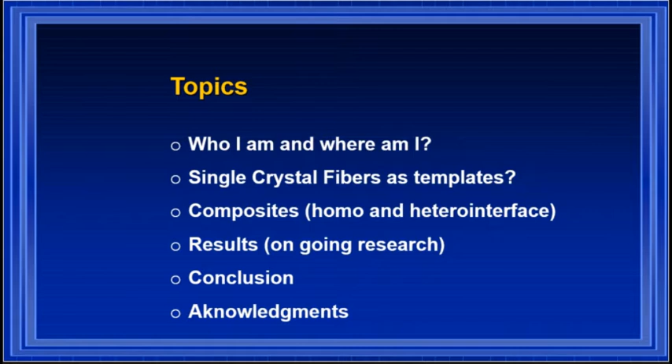Let's start with who I am and where I am. My name is Marcello Andreeta. I'm an associate professor at the Materials Engineering Department at Federal University of São Carlos, Brazil.

My research topics of interest are photonic materials processing regarding laser and microwave, clean energy harvesting, generation, efficiency, single crystal growth with new and conventional techniques, oxide glasses with laser processing, composites, and innovative devices.

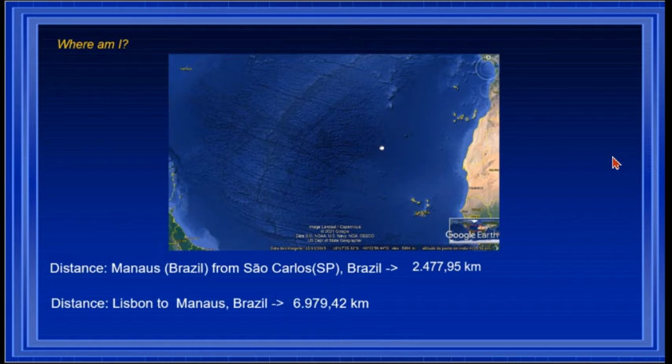Where am I? So we should all be here at Lisbon. If we go around the Atlantic, we can move to the rainforest, where everyone knows where it is, and we are far away from it in São Carlos University at São Paulo State in Brazil.

So we can see the difference in distance from Manaus. These are all well-known cities from Brazil.

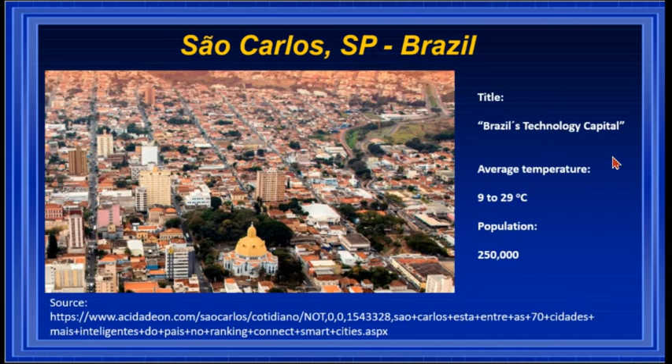This is our city, São Carlos, in the state of São Paulo, Brazil. It has the official title of Brazil's technology capital because of the several universities we have in the same city. The average temperature during the year ranges from 9 to 29 degrees Celsius, and the population is around 250,000 people.

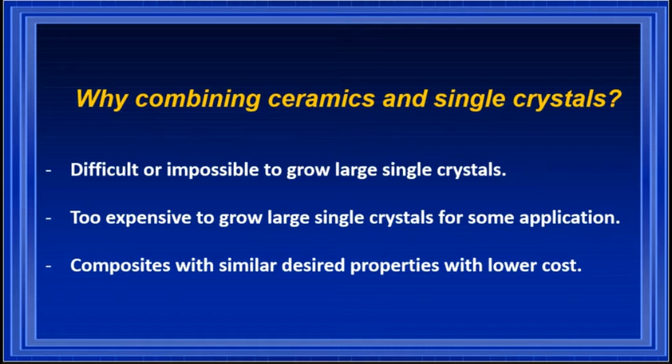So why combining ceramics and single crystals? You might consider the case where it might be very difficult or even impossible to grow large single crystals, or too expensive to grow large single crystals for some applications. The composites might have similar properties with a lower cost.

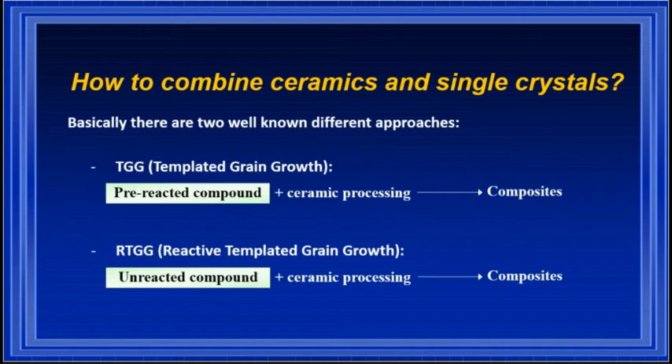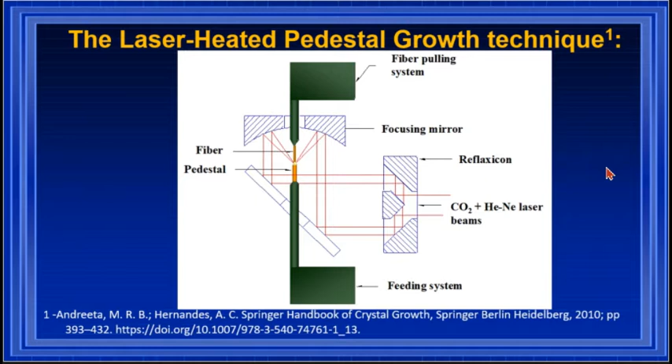There are some techniques to produce single crystal fibers. One of them is the laser heated pedestal growth. A CO2 laser is used to heat a pedestal, creating a molten zone, and then the procedure is similar to a miniature floating zone—the same procedure as the conventional, well-known floating zone technique.

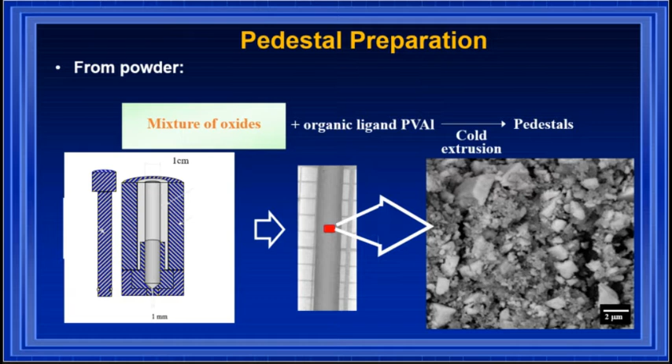The pedestal preparation, in our case, was done just with a mixture of our oxides with the introduction of an organic ligand, polyvinyl alcohol, and then through a cold extrusion process we produce cylindrical pedestals. We use this pedestal as-is, without sintering, to produce the single crystal fibers.

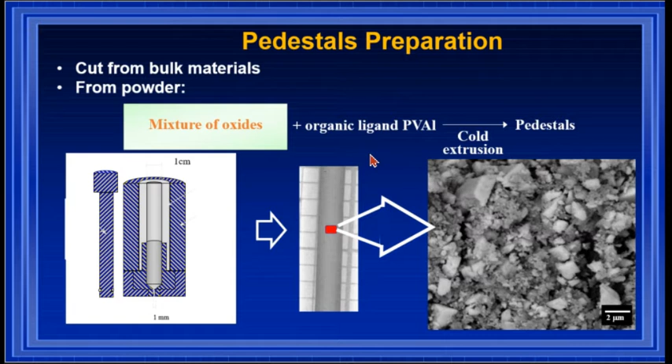This is the case where we produce the lanthanum aluminate fibers and zirconia fibers that we are going to use in this work. To avoid diameter fluctuation, we developed in our lab an automatic diameter control based on an artificial vision system. It looks at the molten zone and then controls the laser power and the pulling speed to control the diameter.

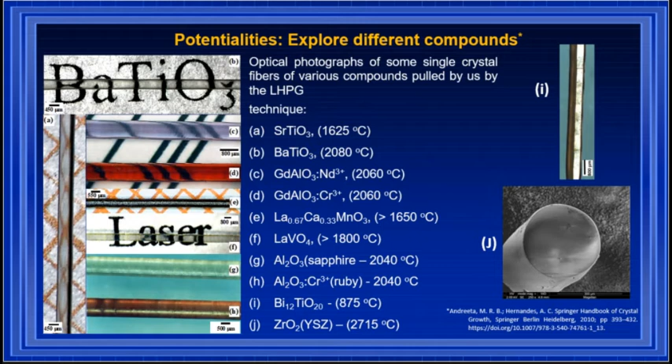In a previous work, we already did some work using strontium titanate templates in PMN-PT ceramics, and we got excellent results regarding texturing the ceramics, as you can see here in the dielectric properties.

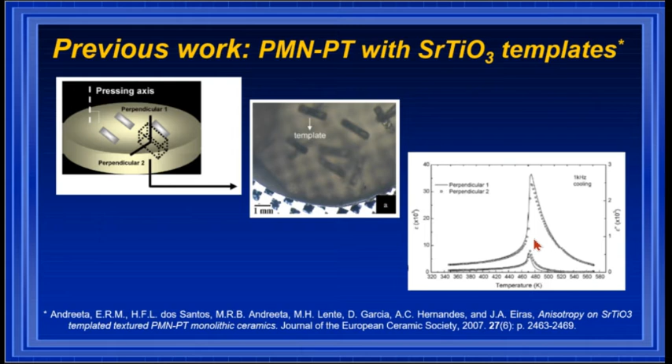So what else is new, since we already did some single crystal fiber templates inside ceramics? We think that we can improve the design of the electrolyte.

If we think of an electrolyte as a material between two electrodes, we are searching for better ionic conductivity in this solid state electrolyte. Our hypothesis is that if we combine ceramics that can interconnect the two electrodes, besides the single crystal fibers, it will create an interface that can interconnect the two electrodes without any grain boundary. That's our hypothesis, to try to improve or enhance the ionic conductivity of solid state electrolytes.

Regarding the fiber-ceramic combination, we can have a homointerface, where the composition of the ceramic is the same as the fiber, and a heterointerface, where the composition of the fiber might be completely different from the ceramics.

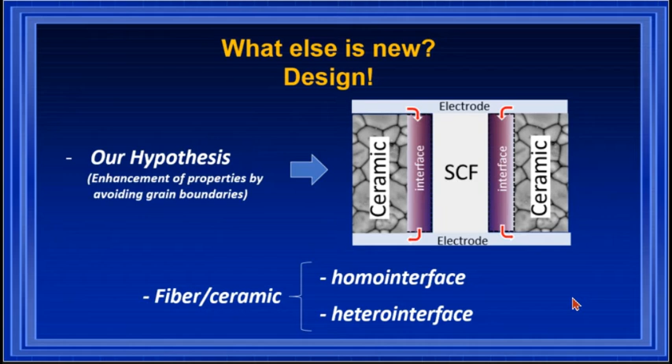Now I will present some of our results regarding the composites. We start with the homo interface, where we use yttrium stabilized zirconia fibers in a ceramic that is also yttrium stabilized zirconia. The composition was 8 mol% yttria, and the sintering temperature was 1600 degrees for 2 hours.

From the EBSD analysis, we see that in the ceramics there is no texture, so we have all crystal orientations from the yttrium stabilized zirconia. But in the crystal, of course, we have just one orientation. What was interesting is that during the sintering process, an epitaxial growth occurs at the surface of the fiber.

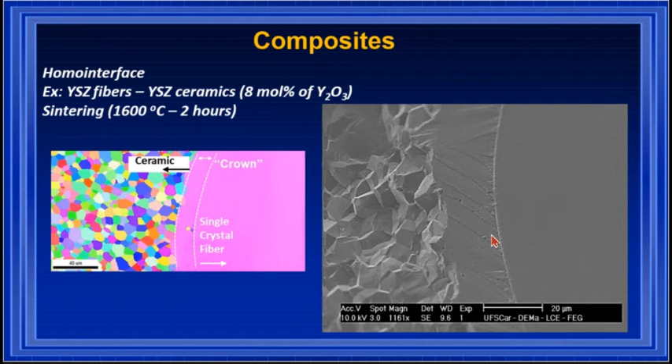We can see that we generate here also a single crystal that we call the interface between the two, the ceramic and crystal. In the case of the ceramic, we call it the crown, because it surrounds all the fiber. The Raman measurements in these composites have shown us that in this region of the interface we observe

a phase transition at the surface of the fiber from cubic to tetragonal zirconia. We believe that this occurs due to the high pressure involved in the sintering process.

If we do a thermomechanical simulation of the sintering process, we can see the pressure can go as high as 2 gigapascal. At room temperature, we can correlate the Raman shift of the tetragonal phase with pressure, and we analyze it, showing that in this region the pressure can go as high as 1 gigapascal.

This could be a method to produce self-strained interfaces, which could also be one of the reasons to improve or enhance the ionic conductivity in zirconia materials.

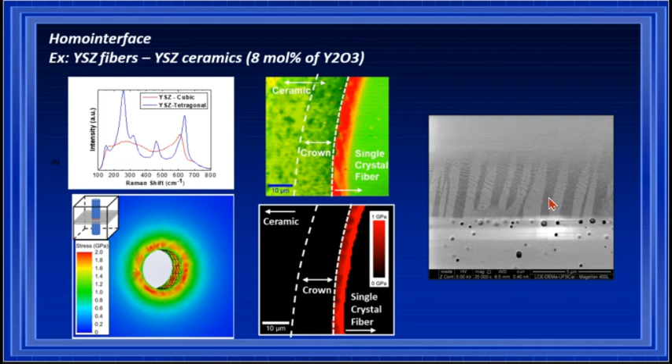Here we show a micrograph of this region, where we can see the phase transition from cubic to tetragonal in these composites. And when we measure the overall

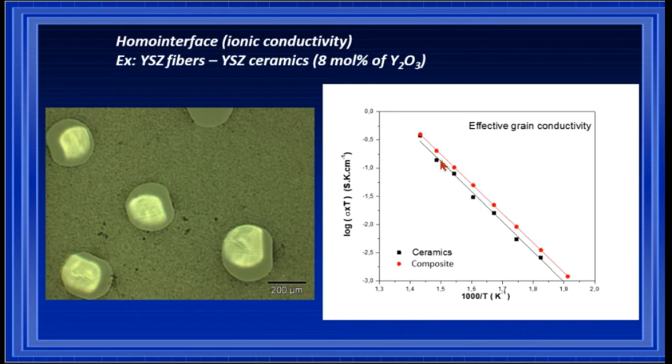conductivity of the sample compared to the ceramics without fibers, we can see an increase in conductivity regarding the effective grain conductivity when we analyze the fibers. The fibers within the ceramics give us an increase in conductivity compared to the ceramics itself.

Regarding the heterointerface, we studied the lanthanum aluminate fibers in a matrix of lithium lanthanum titanate, LLTO. It is well known that it is very hard to produce single crystals of lithium lanthanum titanate, so we tried to produce in situ crystals interconnecting the two electrodes, as we said before.

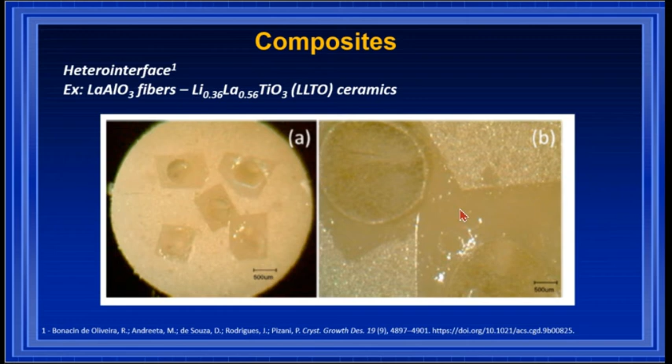We can see here the ceramics with lanthanum aluminate fibers, where we see very nicely shaped crystals growing on the side of the fibers. In a micrograph, we can see the crystals developed from the lanthanum aluminate fibers and the ceramic matrix, with a very sharp interface here.

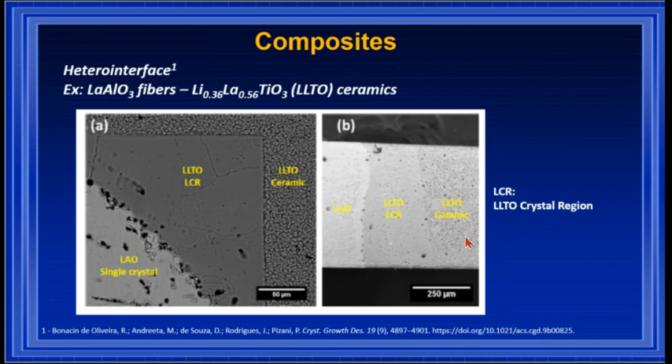When we cut the cross section, we can see the lanthanum aluminate interconnecting the electrodes and the LLTO, which we call LCR, with this LLTO crystal region interconnecting the two regions without any grain boundaries. Also, the LLTO ceramics have a lot of grain boundaries here, okay?

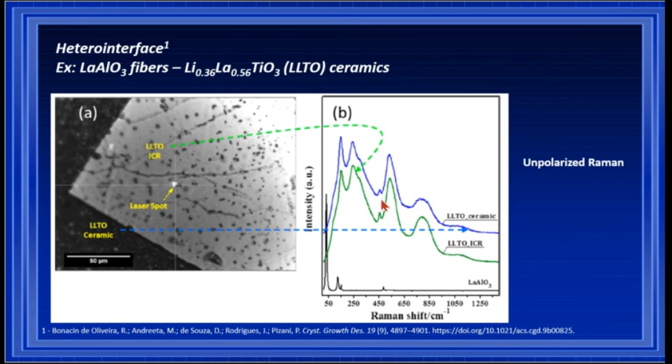We also analyzed with Raman to see if we are getting the same structure in the ceramics. When we compare the LLTO ceramics with the LLTO LCR region, we see we have the same structure. There are differences in the intensity of the bands due to crystal orientation, but the structure is the same for unpolarized Raman.

We also measured the effect of the crystallographic orientation of lanthanum aluminate fibers within the ceramics, using fibers oriented in 100, 110, and 111 directions, and analyzed the evolution with sintering temperature and time. For the 100 direction, there is no evidence of increasing the LCR region with sintering time, it's almost nothing.

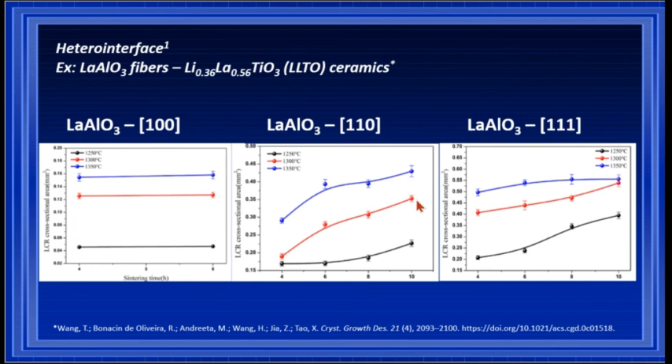It doesn't grow any crystals considerably along the side of the fiber. However, when we use 110, we see that increasing the sintering time also increases the area of the LCR region. The same for 111.

Looking at the optical photographs, we confirm that higher sintering temperatures give larger crystals, but regarding orientation, with 100 we got almost very small crystals on the side of the fiber.

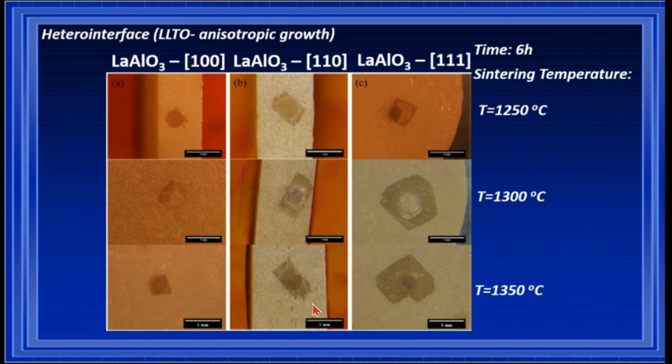One very interesting feature is that with 110, we get a very anisotropic growth along the side of the fiber. Looking at those heterointerface regions regarding conductivity, compared to the ceramic without fibers, the crystals, the LCR regions, have much lower resistivity.

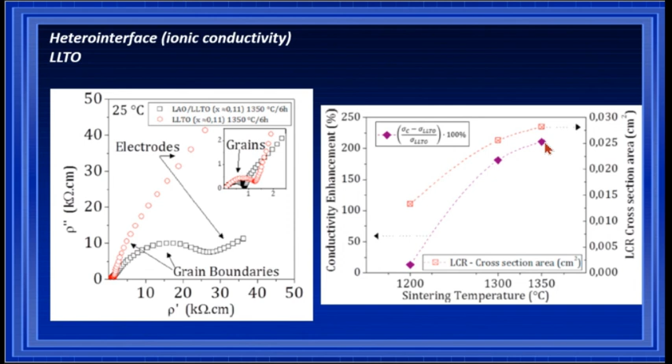When we compare the overall enhancement of conductivity compared to the ceramic without fibers, we see the same behavior: the LCR increase also boosts the enhancement, and we got an enhancement of conductivity up to 200%.

In conclusion, the laser heated pedestal growth, being a very fast crystal growth technique, is a good method to prepare the crystal templates. The new template design has shown that it can improve the ionic conductivity in solid electrolytes.

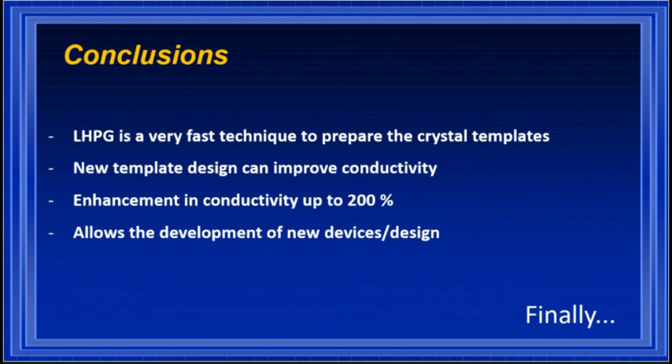This enhancement in conductivity can go up to 200% in our case, and this might allow the development of new devices and designs. Finally, on behalf of the authors, we would like to thank Brazil and China's funding agencies,

and also I would like to share our research motto from Tadahiro Sekimoto: those who dominate materials dominate technology. Thank you very much for your attention.